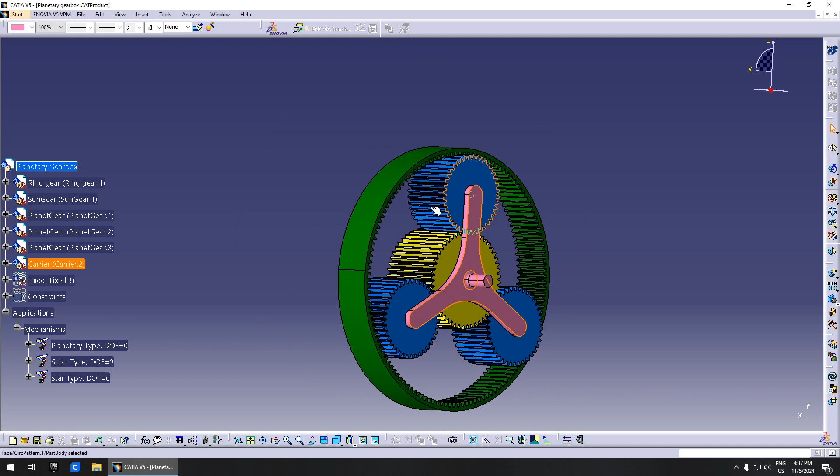around the sun gear and are driven by the sun gear, the ring gear, an outer gear that encircles the planetary system. This has internal teeth and meshes with the planet gears. And finally, the carrier, which is a piece connecting the planet gears together and spins concentrically to the whole system.

From now on, to make things clearer while using the formulas, we will call the sun gear gear A, the planet gear gear B, and the ring gear gear C, and we'll refer to the carrier as D. It turns out, in order for a planetary gearbox to work, it needs to respect a few conditions.

First, and most important, is the number of teeth on the ring gear needs to be equal to the number of teeth on the sun gear plus 2 times the number of teeth on one planet gear. So it's ZC = ZA + 2ZB. This will satisfy the necessary center distances for the gears to match.

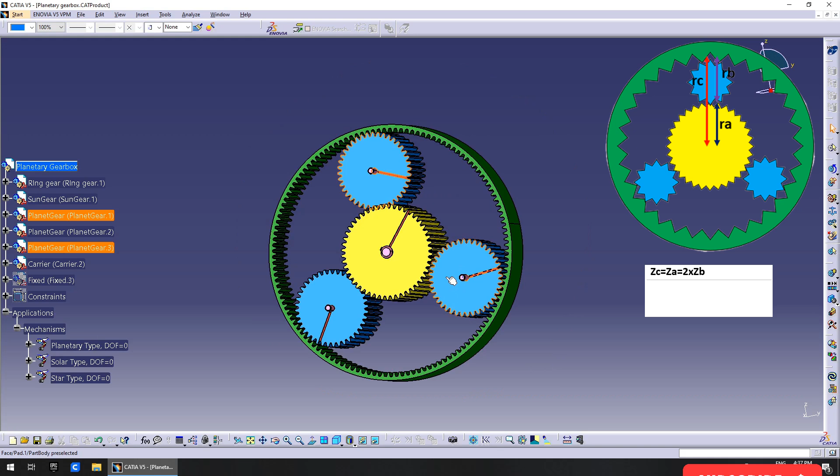Secondly, the number of teeth on the sun gear plus the number of teeth on the ring gear divided by the number of planet gears needs to be an integer. This will assure the gears will be evenly spaced around the system. And finally, not as important but still important for it to work, is you need to satisfy this condition to allow the gears to mesh without interference.

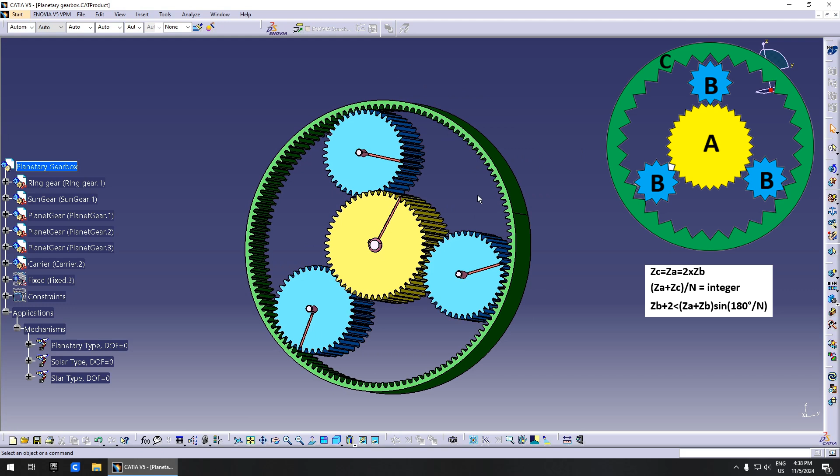I say it's not as important because this usually checks out, and if this doesn't check out, you designed the mechanism horribly wrong anyway. So, after we respect these conditions, we need to pick what type of gearbox we want to make. There are three types depending on the element we assumed as fixed.

First, we have the planetary type, where the internal gear C is fixed, and the input is the sun gear A, and the output is the carrier. It's this type of arrangement, and it looks like this. So you see, the gear C is fixed, and everything else moves.

We have the solar type, where the sun gear A is fixed, the input is the internal gear C, and the output is the carrier, which is this one. Move it the other way around so you can see how it looks.

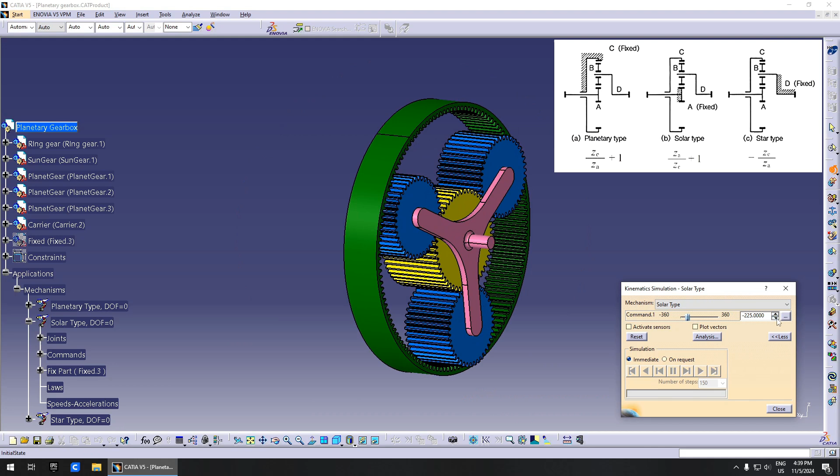And finally we have the star type, where the carrier is fixed, the sun gear A is the input, and the output is the ring gear C. In this configuration, the ratio is simply ZC divided by ZA, and the planet gears are just idlers. They don't factor in the calculations at all. It looks like this.

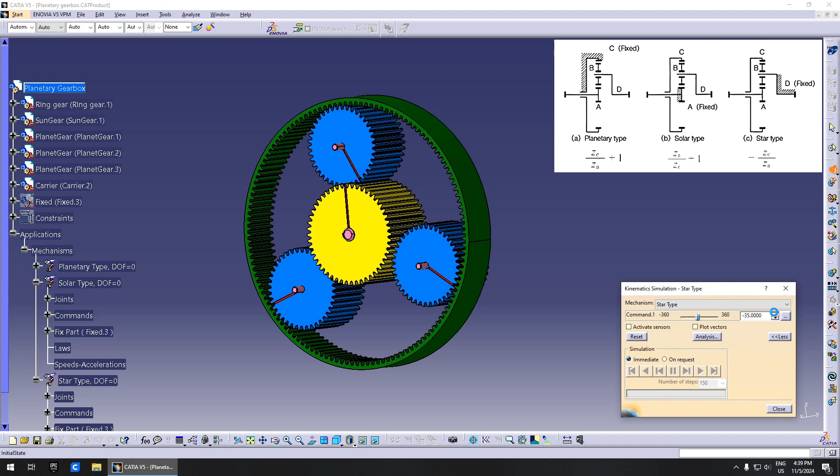Now you can see here I have my three mechanisms in one assembly. This has been actually really hard to do, and I highly recommend you do not do this. You need to have one mechanism per assembly. So, how do we do this in CATIA? Well, first we start by designing the gears, and then we throw them together in a product.

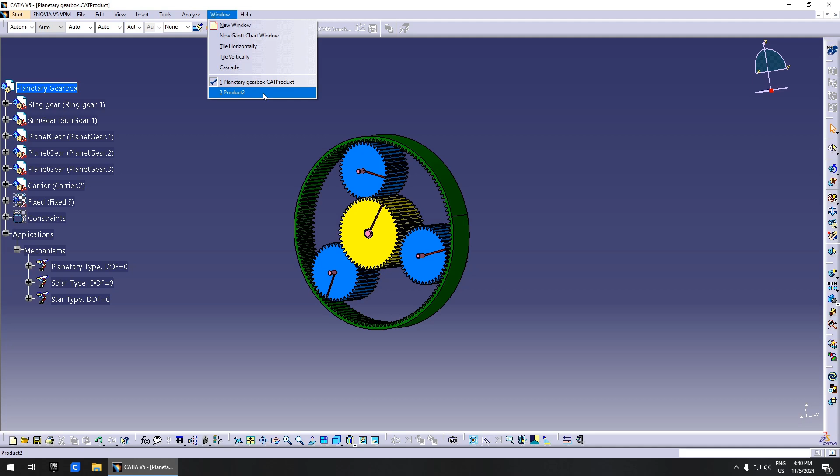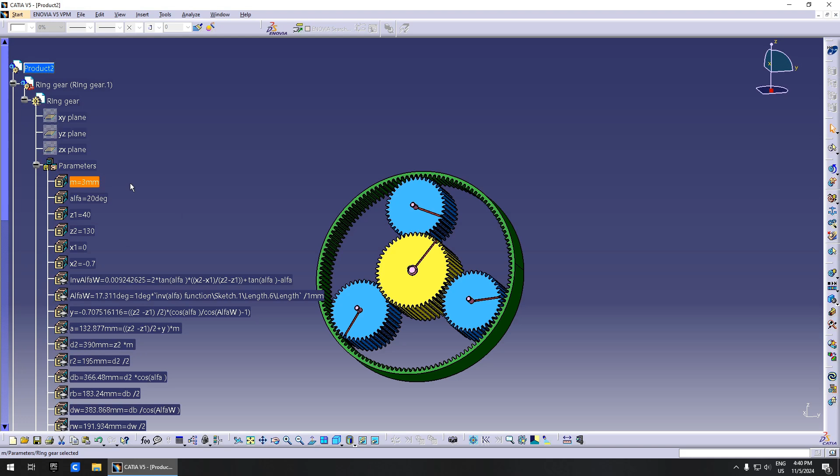But generally speaking, what you need to do is to make sure you have gears with the ability to input these types of parameters. You need to make sure the module is the same between all the gears, the pressure angle is the same, and then you can edit the number of teeth using this parameter here. So you can start however you want. For me, I just start by choosing the number of teeth for the big ring gear. So I chose 130 teeth for this, and then I chose 50 teeth for the sun gear.

Using the first formula, we calculate then the number of teeth for the planet gears, and this adds up to 40. Inside one of the gears, we have the calculations for the center distances, which is A. We only need to do it for one gear, and this comes up to 135. We have the 50 and the 40, z times the module divided by 2. So then we just position the gears and we start making the mechanism.

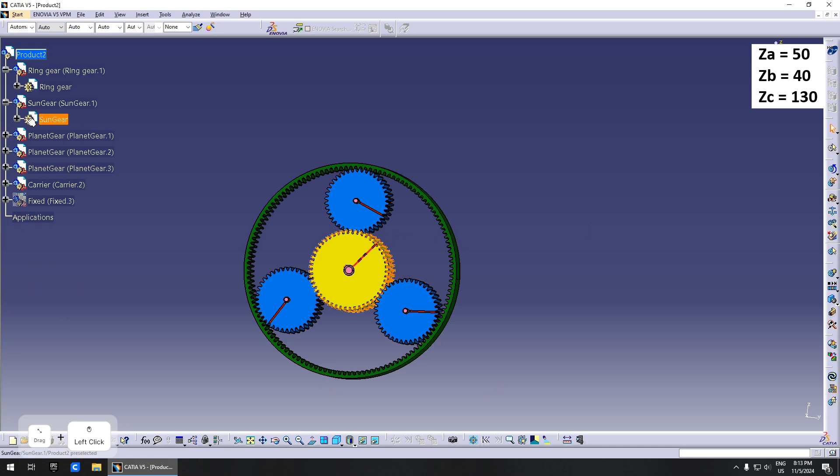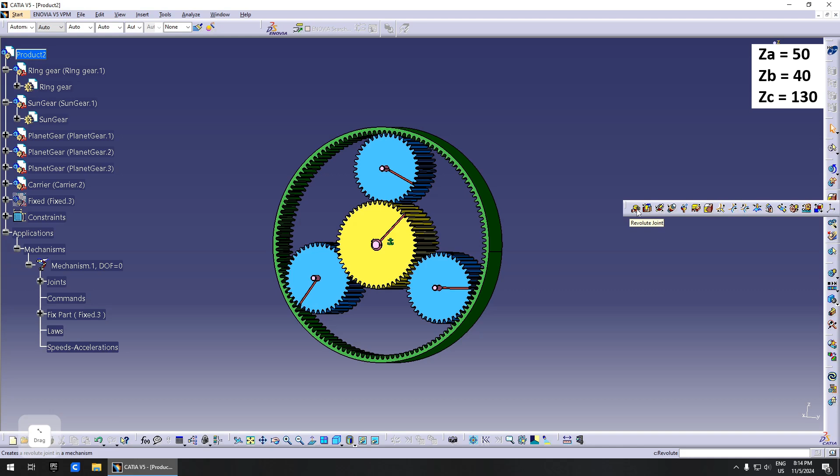So we start by creating a new mechanism. Insert new mechanism. First thing first, we need to set a fixed part. We choose one type of planetary gearbox and we choose the planetary type where we have this one, the ring gear fixed. We start by creating a rigid joint like that. And we have our input then, which is going to be a revolute joint. And it's going to be this gear, and it's going to be related to the fixed element, which is something imaginary hidden in our case. We have the YZ plane, angle driven. Mechanism can be simulated now, but we don't care about that.

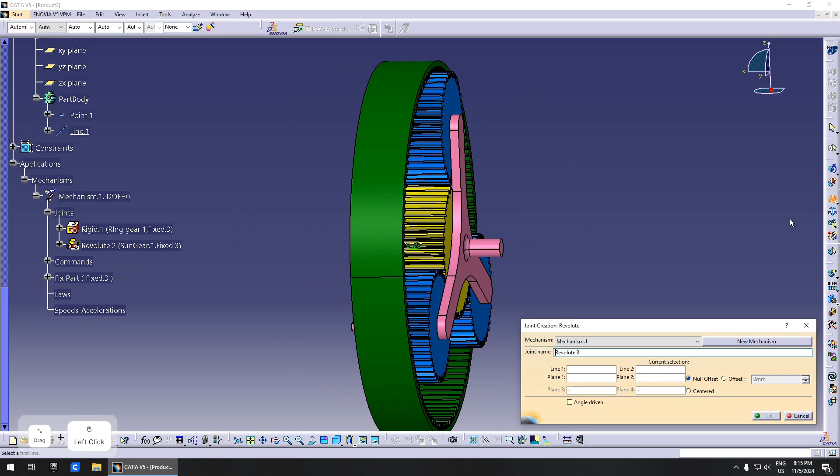And our output is going to be the carrier. Again, you need to link this to the fixed part in order to create the gear. This one, this one. Okay, so if you want to create a gear joint, both the elements you want to connect have to be defined in relation to a common element. So now here you see this is a revolute joint between sun gear and the fixed part, and this is a revolute joint between carrier and the fixed part. If you were to define it to something else here and not the fixed part, it will not work. A gear joint will not be able to be created between the two.

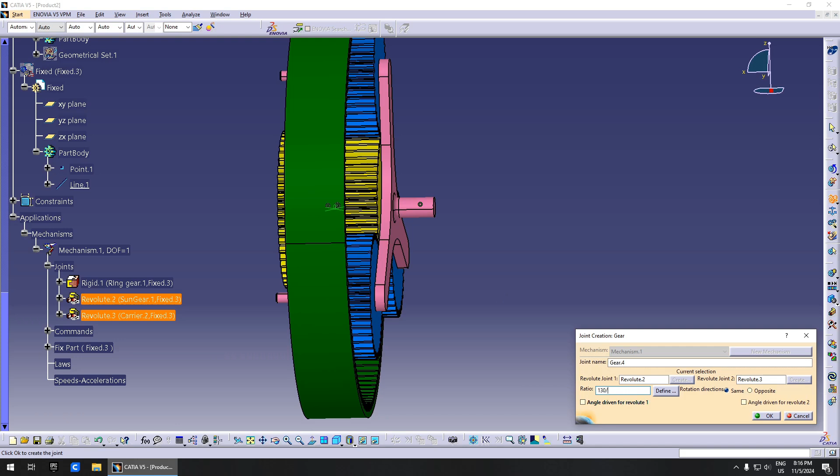And we need to calculate the ratio. We said before the ratio is going to be the number of teeth ZC, which is 130, divided by 50, ZA, plus 1. So this is 3.6. Good. We needed to have this angle driven, and now the mechanism can be already simulated, but we still need to define the planetary gears.

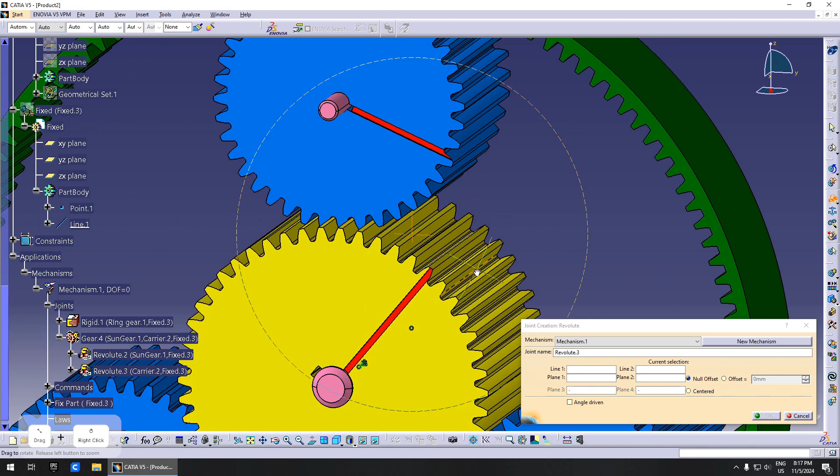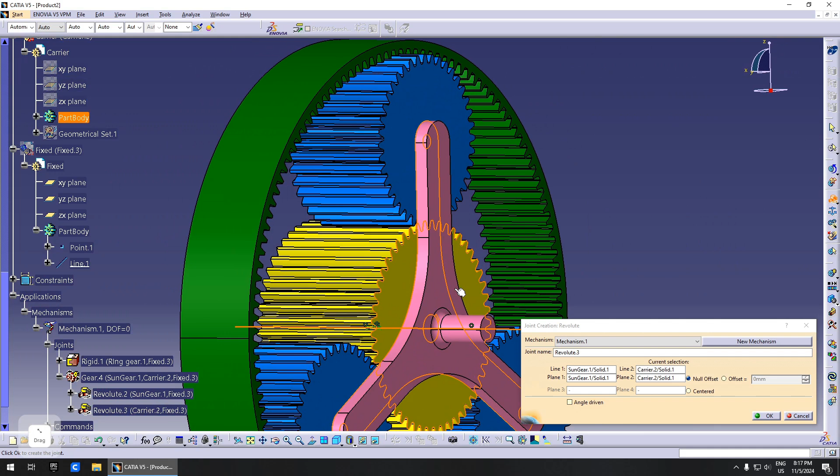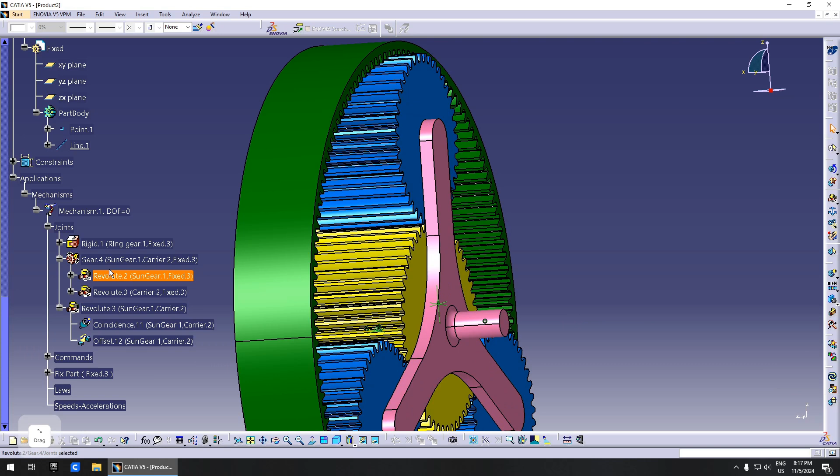How do we do that? Well, we need to link them to the sun gear. I think it's the easiest way to do it. So to do that, we need to create again this revolute joint, but this time we will link the sun gear to the carrier. And why is that? Because we need to link the planet gears to the carrier, and then this one needs to be linked to the carrier in order to create the gear joint. We will not click angle driven here because then it's going to cause an issue. Although this is like a double revolute joint, we already have one joint defining this. It's fine because this is not driven, and this one is already part of another gear joint, and you can see you don't get the error.

Okay, now we create this joint. And we create the gear joint between them. So this is going to be minus 1.25 because it's actually 50 divided by 40, it's 1.25. Mechanism can be simulated. Now before doing the rest, we need to check to see if this is actually okay or not. We put the increment here 1. And then we see. So this joint looks okay. However, this one looks very, very not okay.

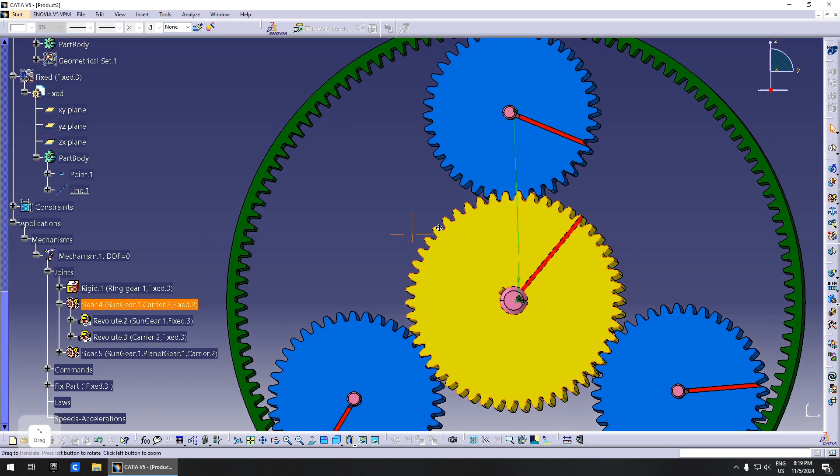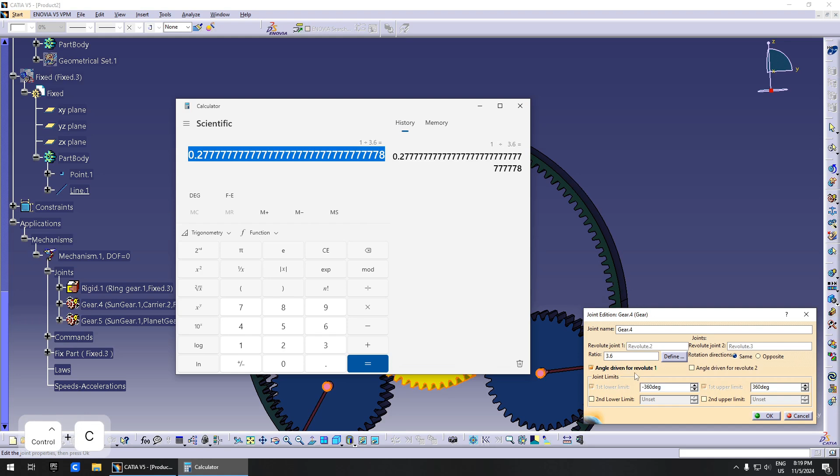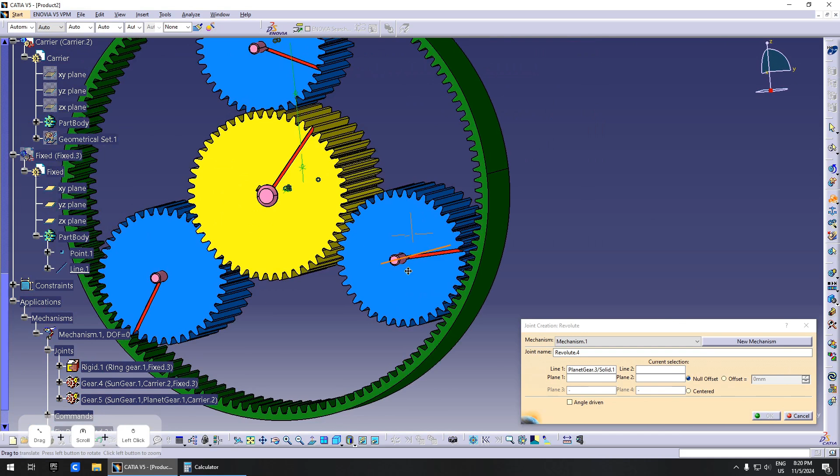So what could be the issue? The issue is because the order in which you select them matters in CATIA. So our ratio that we calculated here, 3.6, it's actually a reverse ratio. So you need to start the calculator and you need to do this, 1 divided by 3.6, and copy this here, and you see that actually this is the correct ratio. So now it works fine. I think you need to always be careful to leave this in 0 when you close it, otherwise it can cause synchronization issues with your mechanism. Now you do the same links for these two planet gears.

Right, so there you go. This is how you design a planetary mechanism in CATIA V5. It's not as straightforward as you would think. These gear joints are a little bit difficult to do and really counterintuitive. That's just the way it is.